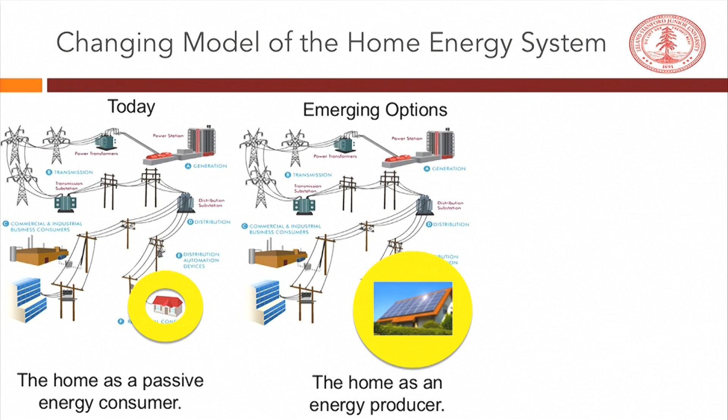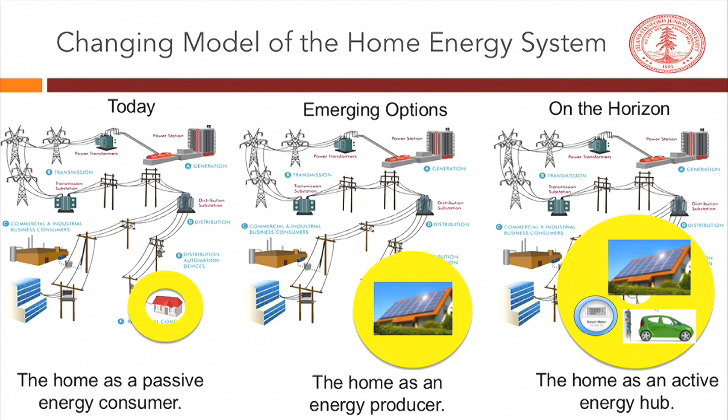But if we look to the future, we can actually imagine quite a different scenario where our home really becomes an energy hub that provides for all of our needs. So our electricity for transportation, our electricity for everything else in the house, and our thermostat is smart and so forth. And not only are we basically producing and consuming, this home energy hub is actually participating in a much broader market with regard to providing energy services back to the grid and getting compensation. So that last vision is what I'm going to be talking about today.

So what are the drivers of change? Why are we going to do this? Well, decarbonization is a big one. Personal choice turns out actually to be a very big one, because often, at least in the short term, these things don't look very cost effective. Battery electric vehicles coming along and the need for basically home charging, that's where people do that. Real or perceived cost savings.

The need for the electricity system to have more responsive loads, that we need to be able to control those and offer services back to the grid in our ability to do that. And then finally, there are some national, state, local mandates. In California, for example, they've now decided that all new homes will be zero net energy. You can question the wisdom of that, but nevertheless, that's where we are.

Okay, so as we imagine this home system of the future, our home energy hub, we actually have a wide range of technological choices to make. For our electricity, we can have grid power, PV, we can provide electricity from batteries, we could even have fuel cells. With regard to heating, we can have natural gas, we can have direct electric heating, we could have heat pumps, we could have combined heat and power if we put fuel cells in our homes. And then with regard to vehicles, obviously internal combustion vehicles, battery electric vehicles, and fuel cell electric vehicles.

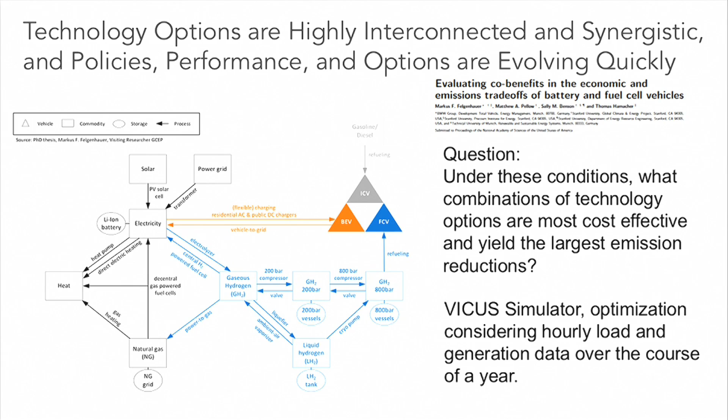You might decide to have a fuel cell in your home for combined heat and power. And all of these are highly interconnected, and the economics of what choices we make need to recognize those. Otherwise, we will have suboptimal solutions. So that's the question we set about to answer.

And we decided to look at this in the context of two different case studies, one for California, Northern California, but with very different climates, very different economic status, and so forth. And then we also picked two communities in Germany and Bavaria, but again, very different demographic, very different climate.

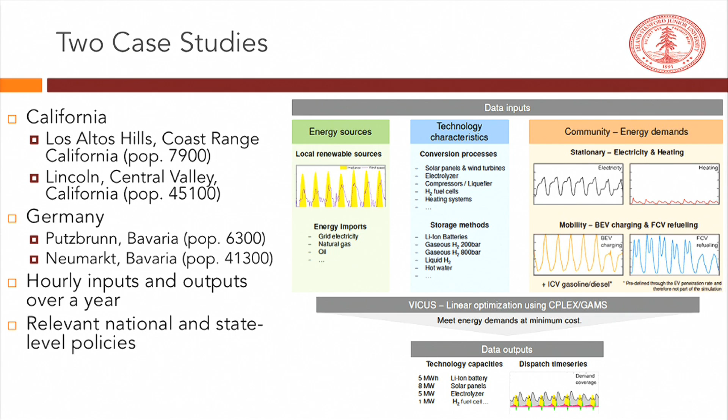And so basically what the model does is you have the inputs, so those are the renewable energy resources that are available. We also have to input lots of information about technology characteristics, and then we also have to understand demand. So for this particular model, we looked at the average consumer in a population. However, if one were to really do this in a more sophisticated way, we would have similar demand data for different populations who behave differently. And then finally, the output is how much energy we're going to use, when we're going to use it, and what are going to be the technological options that we choose to do that.

Okay, to make it somewhat simpler, we decided to limit one set of variables, and that is choices for transportation.

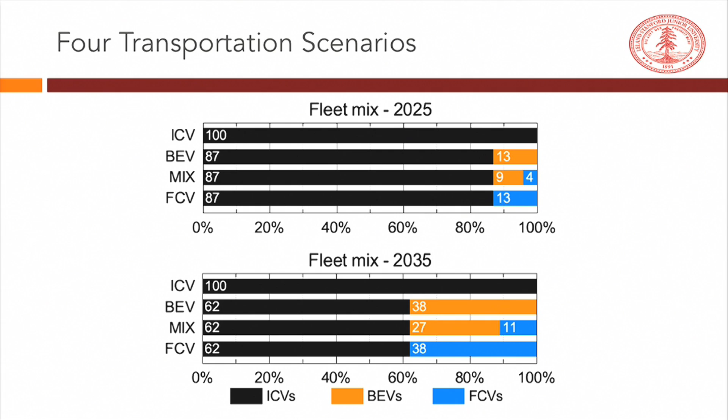We looked at two different time frames, 2025 and 2035. In the first set of cases, for 2025, we looked at a penetration of 13% battery electric vehicles, 13% fuel cell electric vehicles, or a mix. Similarly, we have a much more aggressive scenario in 2035 where we look at 38% total penetration of these technologies.

Here's an example. These are optimized solutions for what people would actually do. On the left-hand side is the battery electric vehicle case. On the right-hand side is the fuel cell electric vehicle case. This looks just at the summer, but we do this for 365 days of the year.

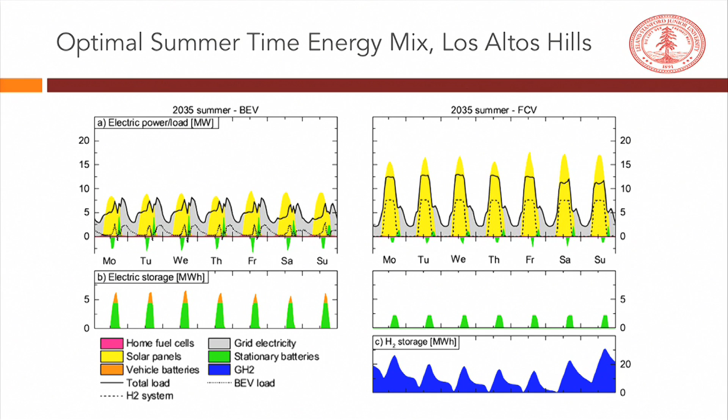In both cases, we're using a lot of solar in the cost optimal solution, anywhere between 50 to 60% of total energy demand. We've introduced storage into the system, shown in green there. You can see when we're storing and when we're using that stored electricity, and we're also charging our electric vehicles. For the fuel cell case, it's quite similar, but we're producing a lot of hydrogen for our fuel cell vehicle. So this is what the solution looks like, with large PV deployment in both scenarios.

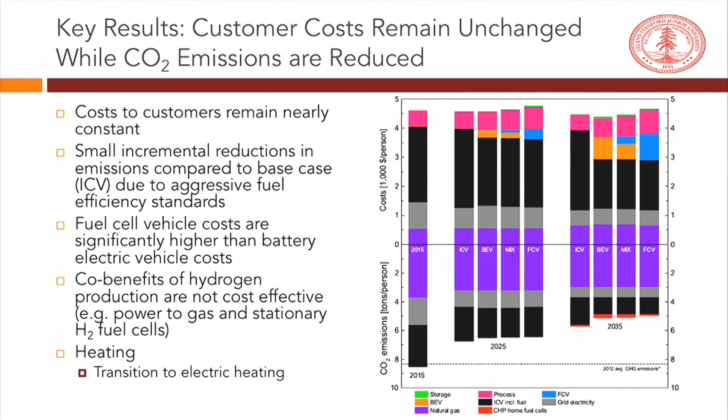One of the details buried in there is basically that fuel cells are a lot more expensive. Interestingly, we found that all these potential co-benefits of producing hydrogen that could be used locally are too costly in the California context. And then for heating, in the German cases we see a large switch to electric heating, which didn't happen in the California scenarios because we've got very, very cheap natural gas.

So some other interesting facts about this: if we look at the cost per ton of CO2 reduction comparing these scenarios, by 2025 the battery electric vehicle case shows almost no incremental cost, which is very interesting, and a lot of auto manufacturers are seeing this as a possibility. Fuel cell switching, particularly in the short term, is over $600 a ton, very uneconomical. Looking out to 2035, battery electric vehicles look like the lowest cost option, but fuel cell vehicle costs remain very high.

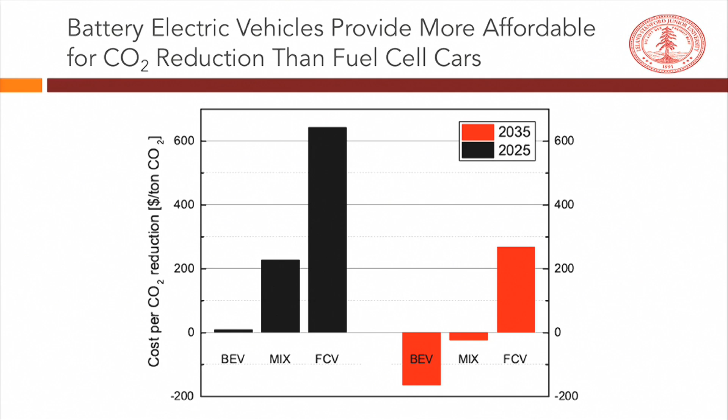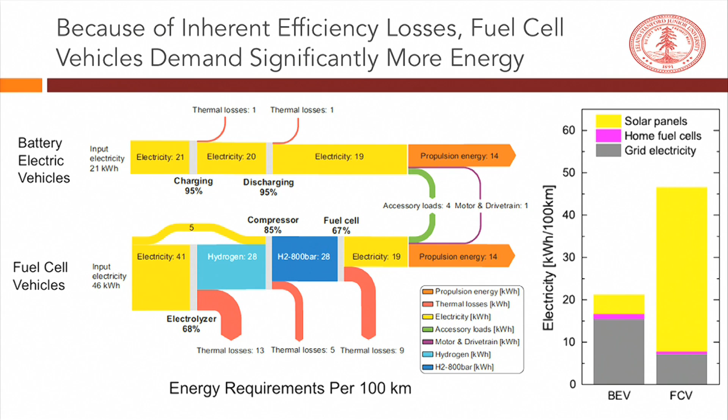The bottom line of why fuel cell vehicles have such higher system costs is that you have to generate hydrogen, store the hydrogen, and then use the hydrogen in a fuel cell. Each of those steps has less than perfect efficiency, and when you multiply them all together, they're only about 30% as efficient as using an electric vehicle. The consequence is you have to put in a lot more PV, like 2.5 times more, to meet that energy demand. So that's the kind of future we may have.

We may not, but we may. If you think about this home energy system, instead of having passive consumers, we're each going to need a home energy management system that will help us optimize the use of the resources we've got in our home. It will need to consider lots of factors: our individual use patterns, weather, future weather, maybe even what our neighbors are doing and so forth. So there's a big data, society, and systems problem.

Second, there's another tier beyond this as we imagine this home energy hub participating in the electricity market. There are all kinds of issues of how much data, when, how do you use aggregators, for example? So again, many very exciting problems. This is a huge opportunity for data optimization. For those of you who are students in the audience, this is a really exciting time to imagine how the electricity system will change and how information, sensing, and controls will help us do this in a much more environmental and cost-effective way. Thank you.